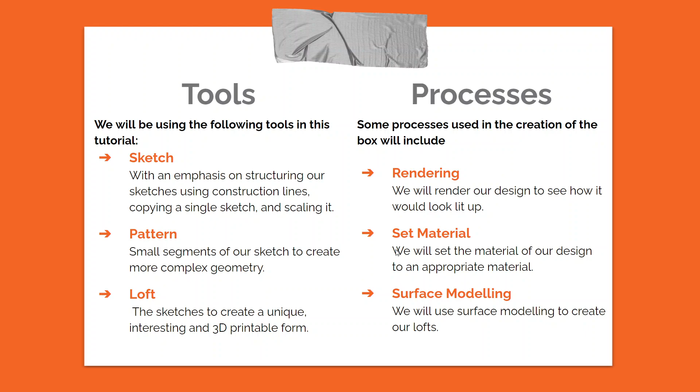So the idea of this is to make a pretty looking lamp. Lamps obviously have the functionality of providing light, but they're doing so in a way that kind of brightens up our environment in more than just luminosity.

The lampshade itself will be a single wall print called vase mode, and it should fit into the rest of your design stably as well. We'll also be incorporating LED strip lighting, like I said before. So without further ado, let's go and get into it.

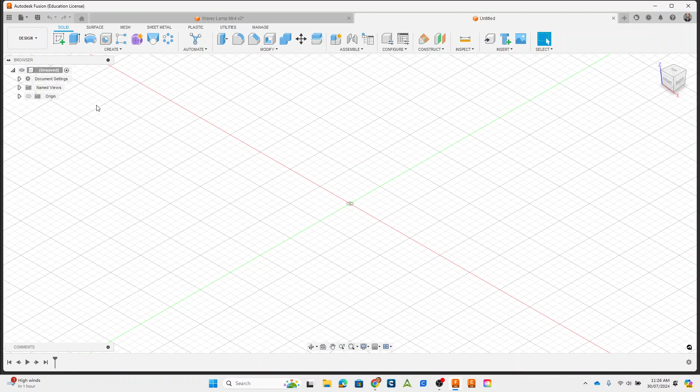Okay, just getting my display up and running. So I'm going to dive straight in. We're going to do our two sketches that I've shown in class before. So we're going to go onto our base plane there, and I'm going to do a construction sketch to kind of shape the rest of the pattern that goes around it.

So these measurements are important, particularly the difference between them. I want 30 millimeters diameter difference between these two circles. So one is at 170, and the second is at 200. Okay, so they are fully constrained to the origin there, and they're construction circles.

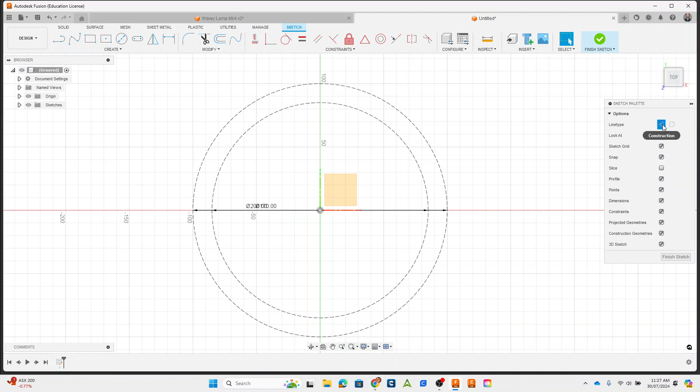If they look like this, they're solid, we don't want that. We want construction lines. You can turn any line between construction or solid just by clicking this little toggle switch here. So now I am going to...

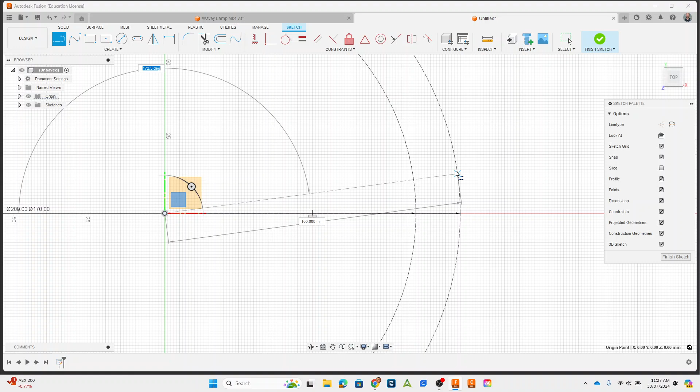Make a couple of straight lines all the way out to the outer circle, again as a construction line. You won't really see the first one there, but you want to click in the middle and come out, and if you press tab, you'll be able to go between the measurement, so it's 100 radius, or the degrees. Here it's measuring from the other side over here all the way to here. I want 10 degrees difference, so I'm going to type in 170.

So this one is 20 from that original measurement there. Always remember to press tab. 30, and I'll do one more just in case I need it. It's also possible that I'll need to go in. Just watch out for these ones as well, sometimes you click and it doesn't register properly. I'm just going to undo that little line that didn't come out properly.

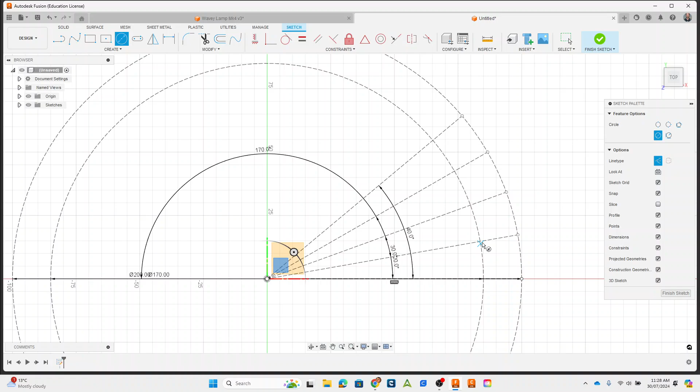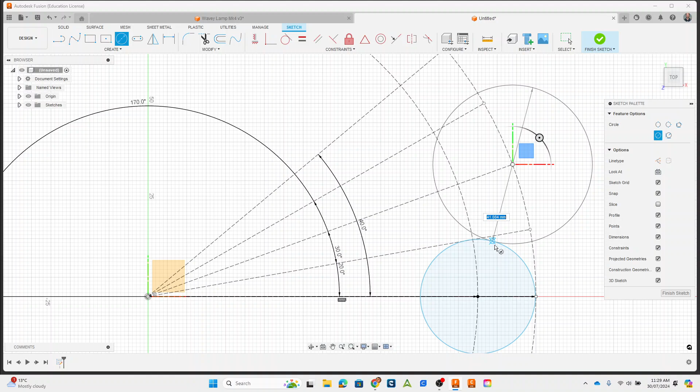Click in the center of the circle, connect to the edge, and then type in the exact degrees that you want. Now what I'm going to do is draw a series of circles, relying on these 10 degree increments for my radius. So I'm going to go to solid line, drawing a center circle here to here. I'm going to look for that X to kind of connect, then connect here, and you'll see that that's like a tangential connection between these two circles.

Actually, what I've realized is I need to do a 5-degree increment here. I think that's the issue I need to solve anyway. So I'll do 5 degrees here. So that should be 1, 5, 15. Another one. 25.

And 35. All right, let's see how this goes. That's better. So I want that one there, and then I want to go 10 degrees, 15 degrees, so 15 degrees more, 5, 10, 15. Draw another circle out to here.

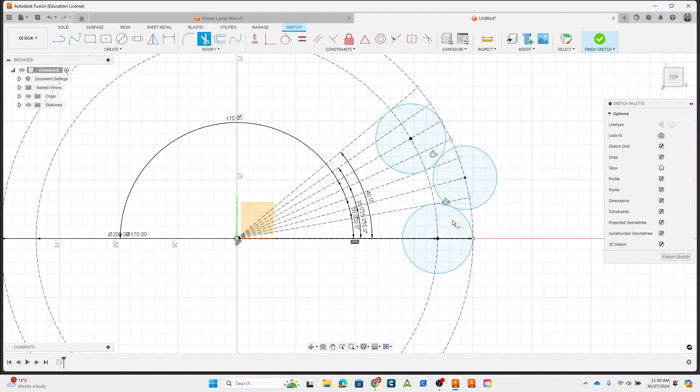That's really all I need to make this kind of repetitive, circular, wavy pattern. I just need really the main segment from these 2 circles, but I need this third one to know where to cut it off. So I need that.

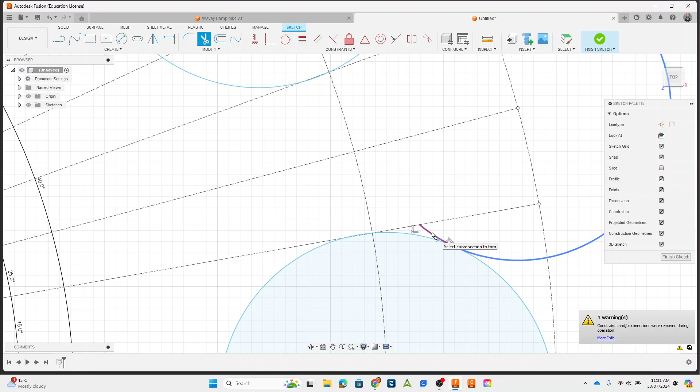What I'm going to do here is go to the trim tool and trim out all these little bits of circle that I don't need. And now I need to pick where this pattern repeats, because I want this to be nice and tidy. So where did I have it last time? What I'm going to need to do here is extend this pattern out just a little bit.

So it'll be 45 degrees. Draw my next circle. So that's 1, 2, 3, 15 degrees across.

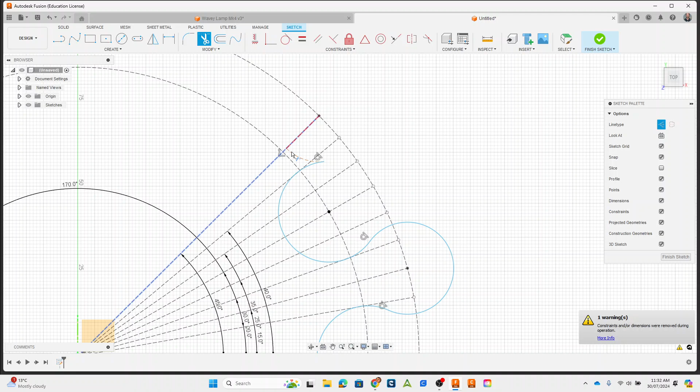This is where I actually don't need to make this solid at all, that's where I trim out my circle. So I trim out all these other bits that I don't need. I want this repetition to be clean, so here to here, and I trim out all of this circle until I get to this spot here.

So what I want this to do is to curve and then meet when I repeat this over the top. I want this to match up.

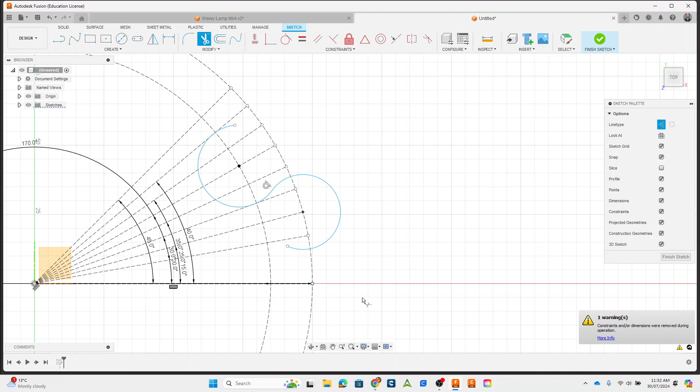So what I'm going to do next is select those 2 parts of the line that I've drawn, control clicking, so I hold down control, click each one, and I'm going to go to create circular pattern. The good news is you only have to do this once. Once you have this sketch, you can repeat it as much as you want.

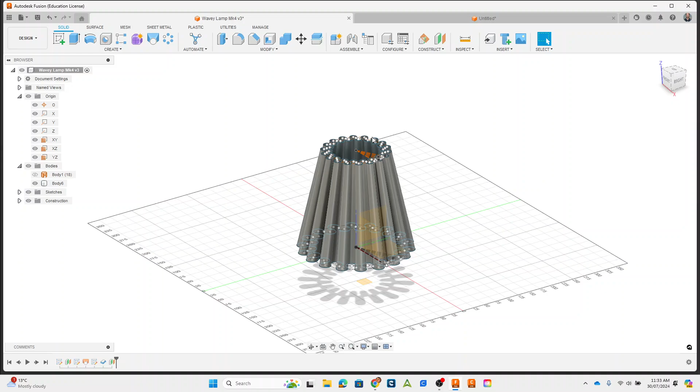Now what I'm going to do is go up in my repetitions, and there I have 12 repetitions there. If you use smaller increments for these angles, I believe in this one I used increments of 2.5 degrees, but you can see this one has the same look, but slightly different result. That's all you need to do for that particular sketch.

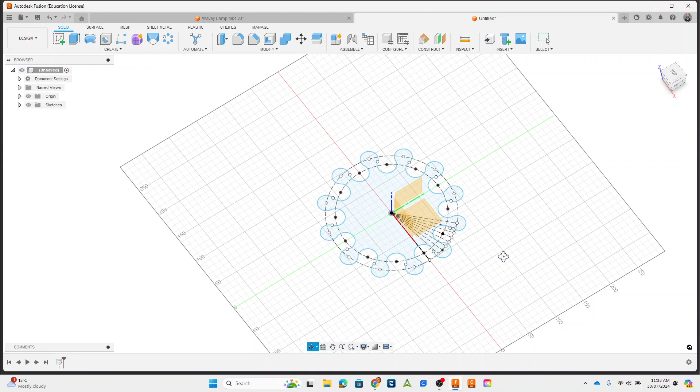Okay, so that's the base shape of our lamp. So what I'm going to do next is run a loft to actually make the lampshade shape.

So I'm having a bit of trouble clicking on this plane here, but I can also make a new plane based on this one as well. And I want to make this one about 200 millimeters tall, maybe a bit less, but I'll start with that. And I'll sketch onto this surface here.

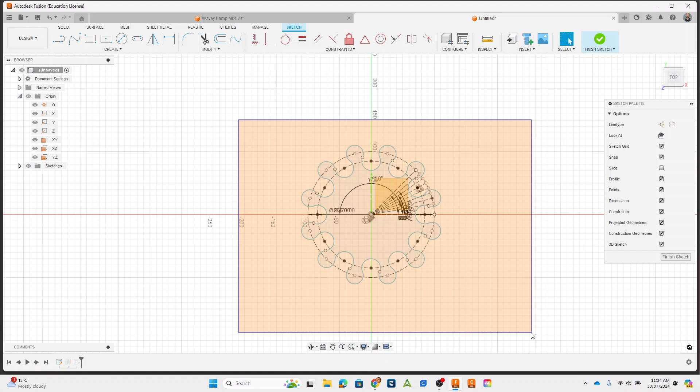Sorry, critical thing I forgot. What I want to do is, before I leave this sketch, go in and select it. So while the sketch is active, you'll see I'm editing this sketch, right-click, edit, select the entire sketch and go Control-C or right-click, copy.

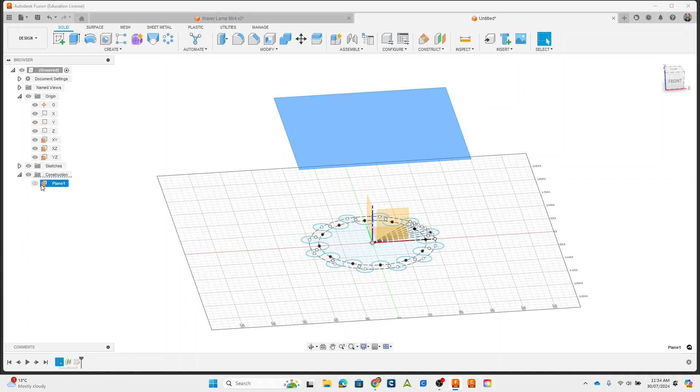Then you go Finish Sketch, then you find your new construction plane, sketch onto that, and then Control-V or right-click Paste. Now I've got two sketches that are exactly the same.

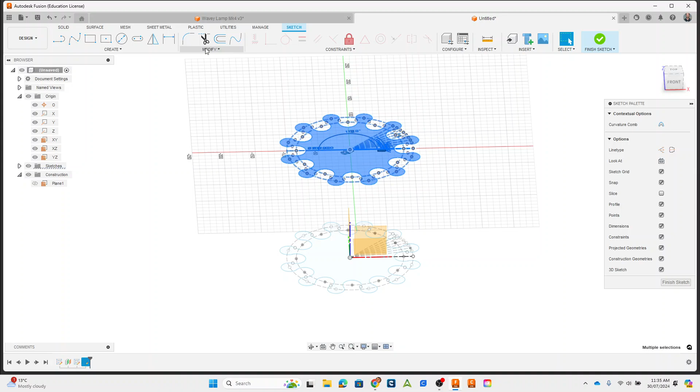I could loft these and they'd look pretty good, but I'm going to go for a bit of a slanted lamp design here. So I'm going to go OK on that positioning, select this all again, and then I'm going to go to Modify, Sketch Scale.

I've already got all the entities, which is all the lines and everything in this sketch, selected. They are going to scale around the origin here. And I'm going to make that 0.6, or 60% the size. Because it's the same sketch, it'll link up to itself really nicely.

So what I do from here, I'm going to switch over to surface mode, because I don't want this to be a solid object. I want this to be a thin lampshade. And you'll see loft here as well. So create loft. What this will do is loft a surface and not a solid.

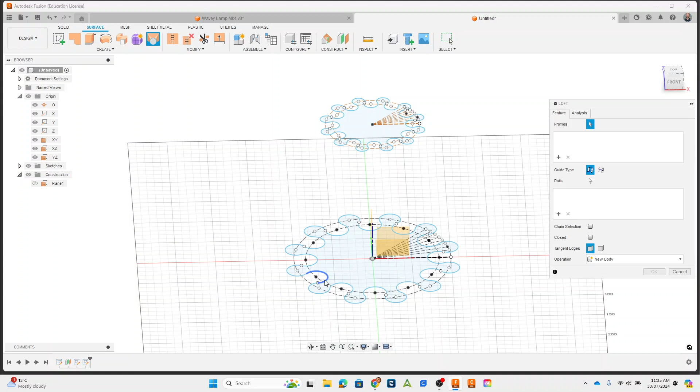So here, loft, section 1, section 2. Fantastic. The way Fusion tells you this is a surface, meaning perfectly thin with no actual volume, is it gives you this kind of orange tint to it. But making this into a solid object is really easy.

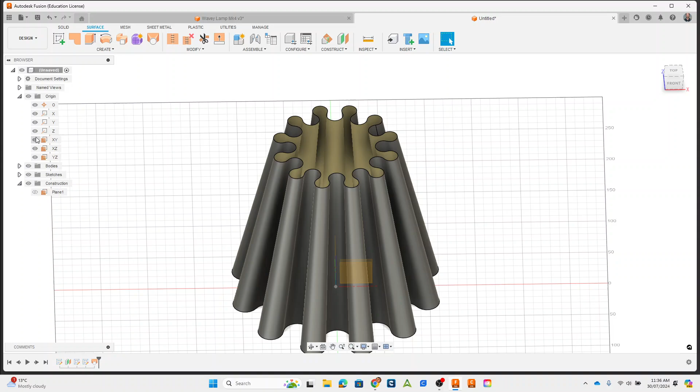All you need to do is actually select the body itself, go back to solid mode, and go create thicken. So with that body selected, I'm going to make that 0.4 millimeters, which is the size of my printer extrusion path when it's actually printing out itself. So I'm going to go 0.4 and hit enter.

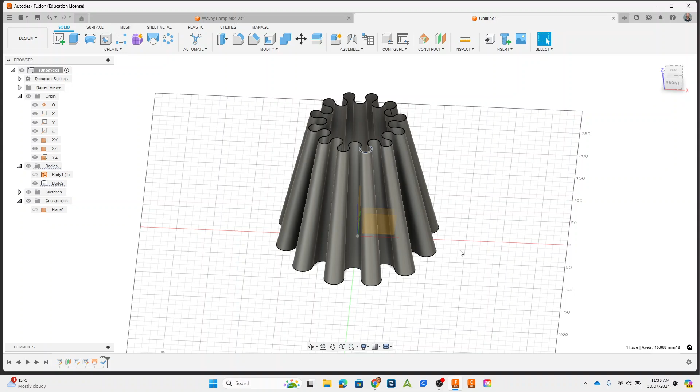And if I zoom in here, you'll see body 2 is now a solid, and it's got a super, super thin 0.4 millimeter thick wall all the way around. That should extrude as one thing, right? So it should just be able to go round and round and round and print really quickly. So that's my lampshade. If I wanted to, I could go in and make a new component out of this. I probably should if I'm modeling the right way.

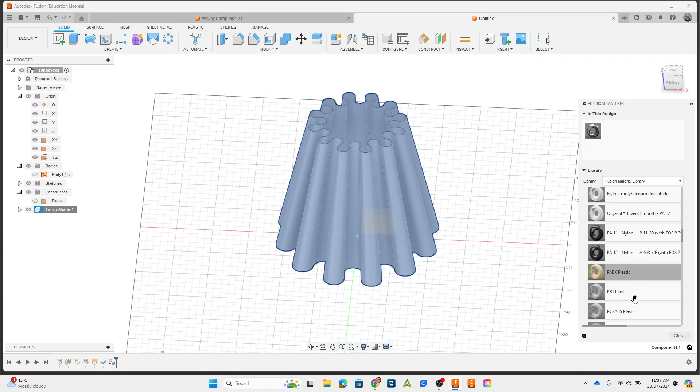I'll call that lampshade, and I'll even go in and change the physical material to the material I'm planning on printing in. That's going to be plastic, PETG, or PET plastic. There we go, PET plastic. I'm just going to drag and drop, and that'll turn it into a transparent type color.

If I ever wanted to edit that physical material, you might be able to edit colors over here. Go edit. I might be able to change this to a green color, maybe. There you go. I can actually kind of render it there as well. We do have transparent green PET and transparent red as well.

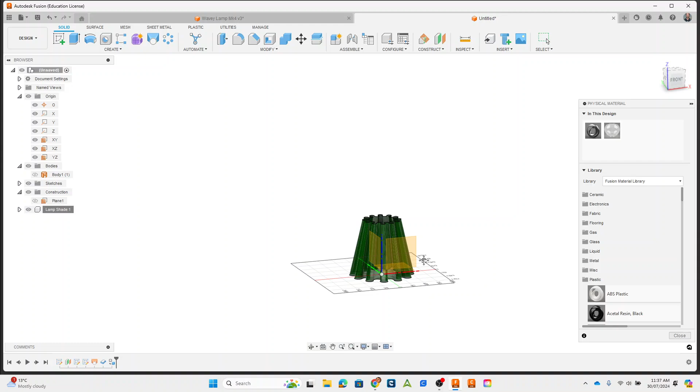I'm going to leave this as transparent green just so I can see it a bit better. But if it ends up getting in the way and making it harder to see, I'll remove it. Okay, I'll close that. Now I'm going to make the base.

This is going to be fairly straightforward. I'm going to use lofting again. What I want this to be is kind of like, I want it to have a little bit of a bulby base and then go up and interact and touch this other component here. All right, so I'm going to be using straight up circles to do that.

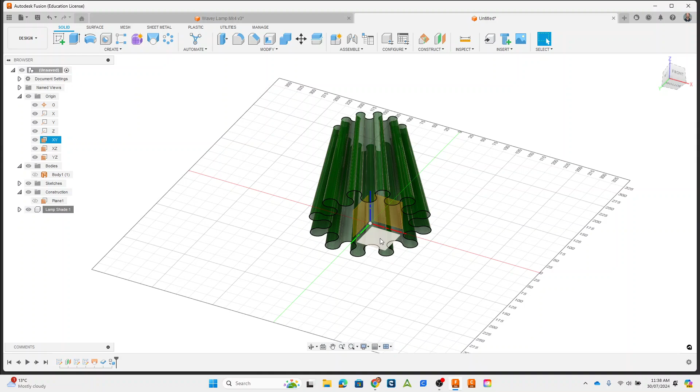First up, I have to go to my planes and actually sketch this out. 75 millimeters below. You can make up your own measurements if you want, or you can copy mine. 20 millimeters above, that should be able to come out, and then I'll restrict it here, and then almost to the top. Go there.

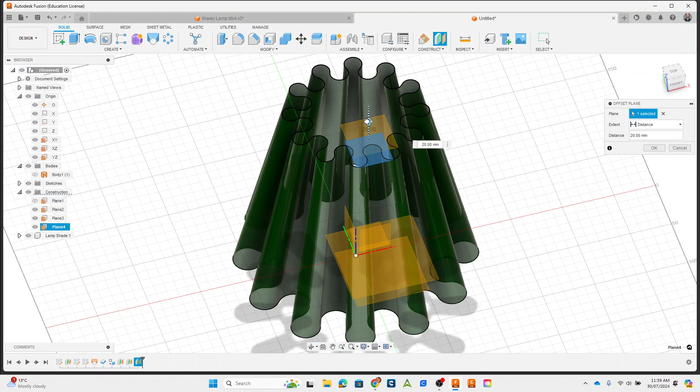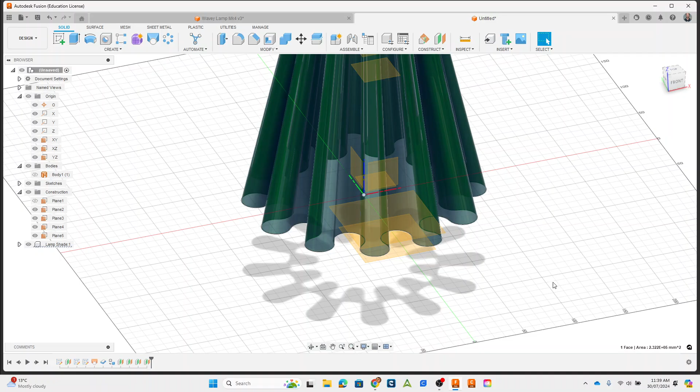And then one more on top of this. All right, so my connection point between my base and my lampshade will be about along here, okay? What I'm actually going to do is get the body of the lampshade and the body of the base to interact. They lock into each other really nicely, and I won't have to do really fine sizing. It should work okay for me.

Okay, I also can't forget to have a section in the middle that's flat, that's perfectly round and cylindrical, so I can add my light strip to it as well. Okay, so I'm going to go through here and add a series of circles. And I'm going to keep my lamp base there.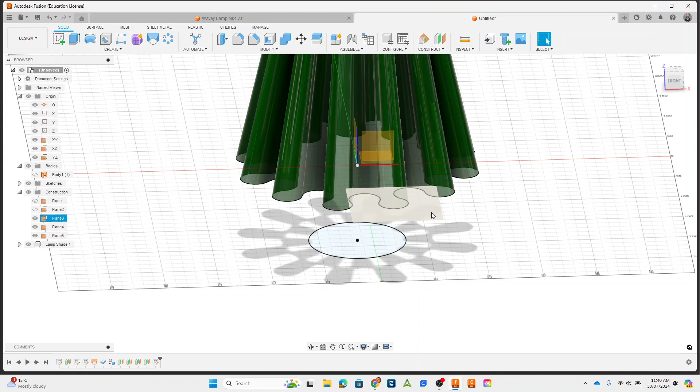So I'll make this one 90. I'm just eyeballing this, I'm doing what looks good. So 90 there. I want this to be quite bulbous, this next part. So I'm going to go to my next plane after I finish that sketch. Add a sketch. Make sure I'm in the middle.

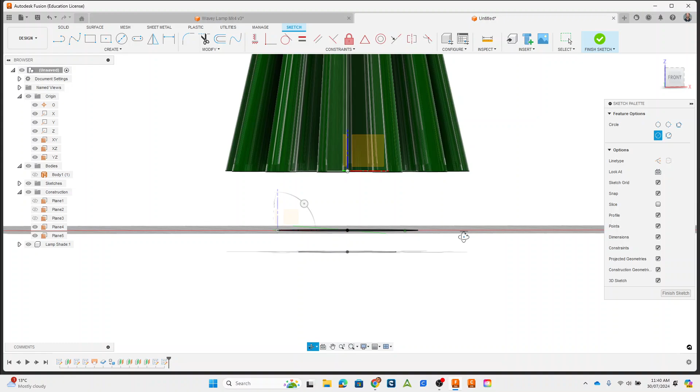And these will be the profiles of your shape as you loft it up. So you can kind of, I'll make it 130. That looks about right. Finish that sketch, I'll go up to here. If it's not quite right, each of these I can come back and edit as I go through. And I will have to edit this kind of curved shape after it's made to make my cylindrical part for the lights. So here as well.

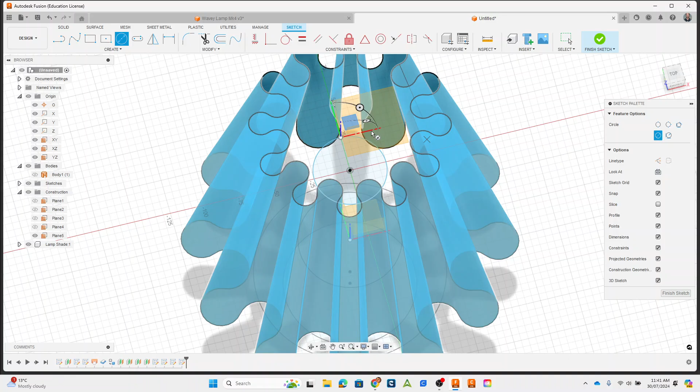Make that 50. And this one, I'm going to make sure that it comes out past, well outside the diameter of my lamp. Okay, so see there? I don't want it to be inside here at all. I want it to be well outside. And I'll show you why in a sec.

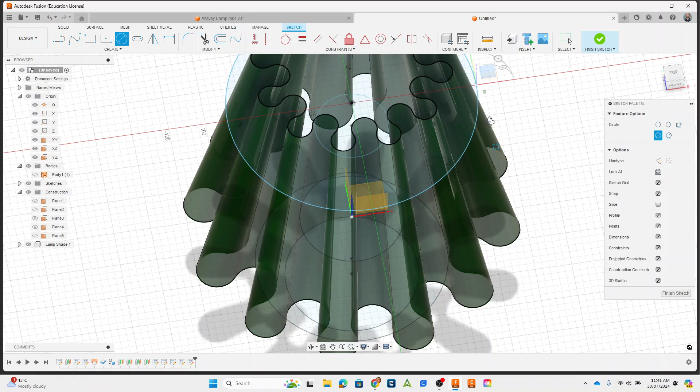Okay, so now I'm going to run a simple loft function on top of this. This will be a solid loft. So I'll go base, next section, next section. Sometimes you have to kind of angle yourself so you can see the next part.

And there we go, I'm going to make this a new component. I'm just going to go straight there to new component. Okay, and if I turn off my lampshade, so if I turn off the view of my lampshade, you'll see the kind of form I've made here. Okay.

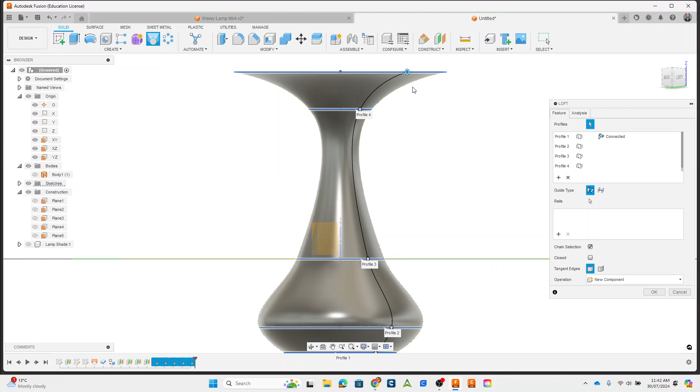Now, one thing I can see is maybe that angle might be a little bit high because I want this to all 3D print nicely. You can see some little kind of, I want this to be all smooth and, you know, yeah, I want it to be like a really even curve all the way. So this one, I might need to change the angle there.

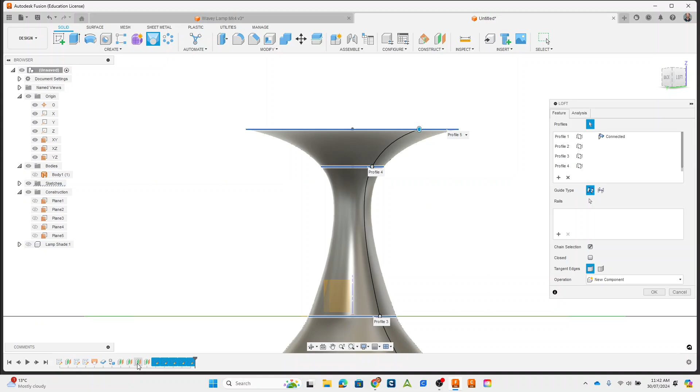I'll do it by actually dropping this sketch plane. I'll go OK on this, and then I'll just tweak my planes a little bit. I'll go edit feature. I'll drop that by 20 mil or so.

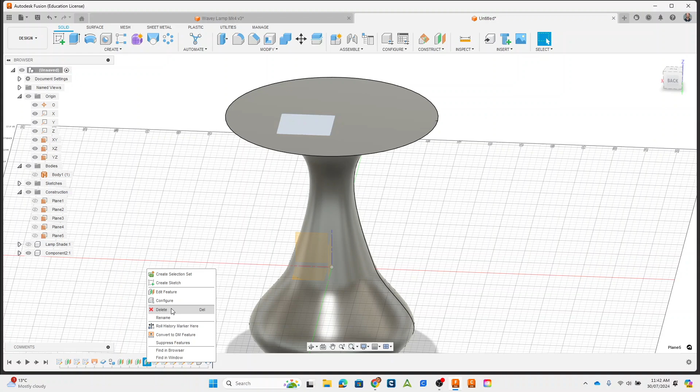I can also get the very top one and move that up as well. So I'll go edit feature. 25 mil, see how that looks. So what I want to avoid is this being too much of an overhang.

Might move this one up just a little bit. See how that looks when it's with my lamp. Cool.

Might move these little ones out a bit more. So I'll go edit feature. Another 10 mil there.

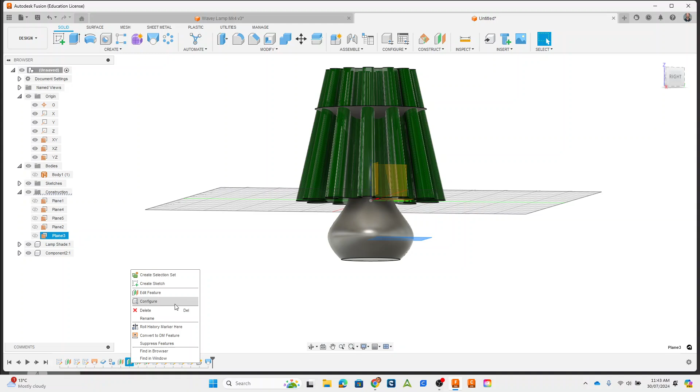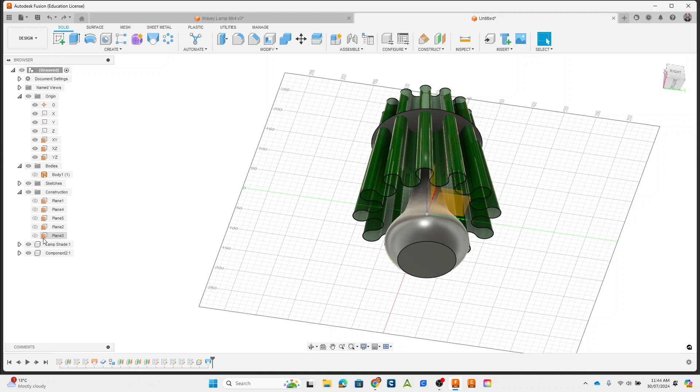I'll leave it like that. Okay, now is the time where I'm going to get the central part worked out. So what I'm going to do is actually use the combine function up here to make this work, and I have to do it between the two bodies of each component that I've got here.

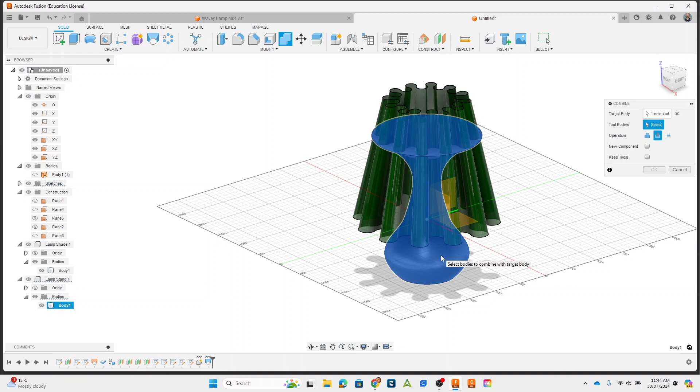I'm just going to rename this component lamp stand, and I'm going to open up these two components here so I can see the bodies of each of them. So I've got body one here, body one here. And I'm going to hit combine and cut. The target body is the thing that I want to cut, and the tool body is the thing that I want to use to make the shape I want to cut. So I want to cut out the lamp base, and the tool body is going to be the lamp shade.

But after this process is run, I want to keep all of the tools involved. I'm going to go all right on that.

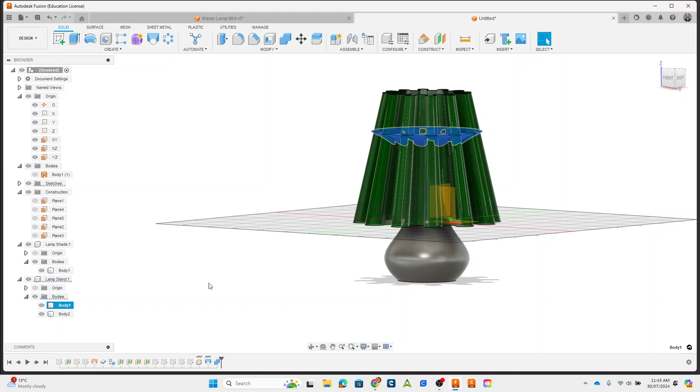And then what we'll see here is I've got two bodies, an inside and an outside body. So body 2, I want to keep. Body 1, I want to delete. Actually, I don't want to delete, I want to do a special remove. There we go. Okay, and now this is sitting perfectly on the inside of our lamp.

Pretty cool. If I print this, I could actually maybe even get away with printing this upside down. Now, I'm almost certain this would work, and it will actually hold the lamp in place. But it's definitely a new thing that I'm trying here.

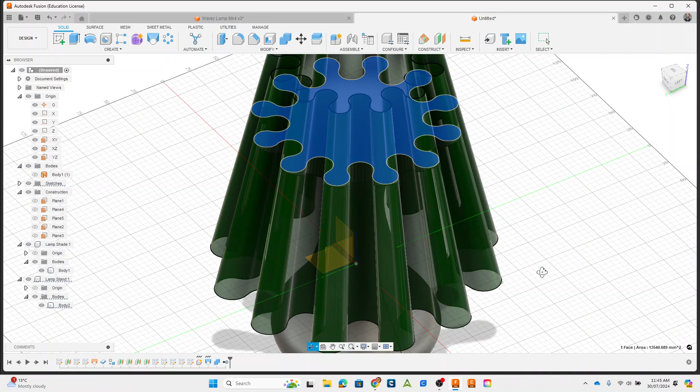Now what I want to do finally is a couple of things. I want to make sure that I can actually put my lights on this lampshade. So I want to go around here, sketch onto this middle part, and I want to actually carve like a square chunk almost out of this side.

I'll pick one side to do a chamfer out of, because remember I have to 3D print this, so I have to do it in a way that's sympathetic to the 3D printing process. Looking at this, it seems like it might actually be best printed upside down, so I might put a chamfer here and then straight here to here. So something like that. I'll go ahead and do that.

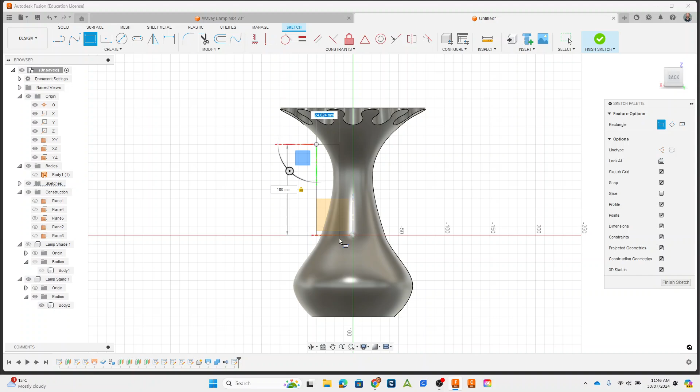I'll do a corner. I'll make it 100 high and 25 across. Good.

I'll put a 45-degree angle on this as well. 135, I believe it is. I'll trim out the bits I don't want, that one and that one. And then with that sketch, I'll run a revolve.

Okay, so I've got my profile selected. The axis I want to select is this one. And that's what it'll do there. So I'm running a cut function revolved around that center part. And my LED strip lighting will wrap around here as much as I can.

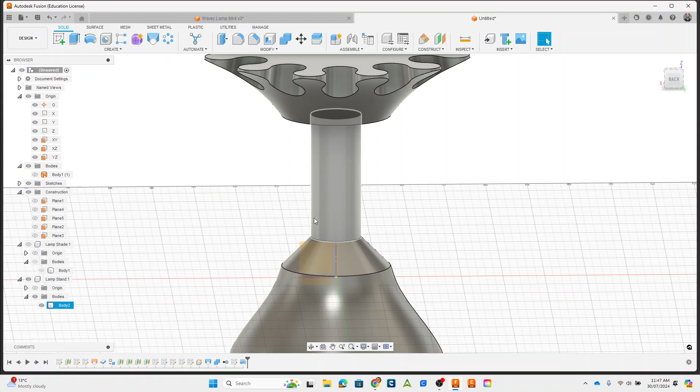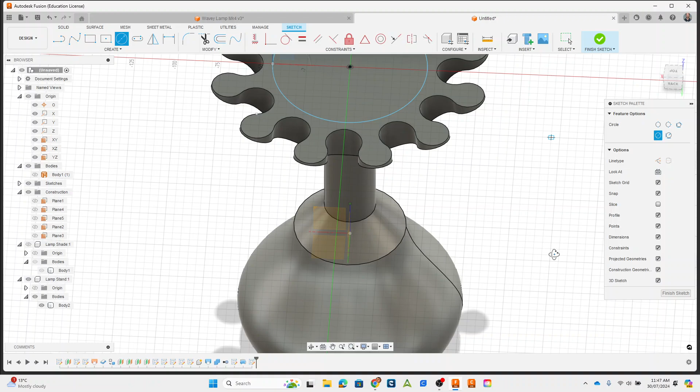Some other things I want to do is maybe remove some material out of here so I can let light through. So I'll sketch onto this one. Draw a circle out to here. I'm using my project function here, so I'm projecting the outside of that cylinder into the middle of my work here, so I know exactly where it is. I can actually use that in this sketch as well.

What I'm going to do is repeat a pattern around here, so I have little slices kind of sticking these two parts of the 3D model together.

What I'll actually do is an offset. So I'm going to make this line here a construction line, then I'm going to offset it by 2 mils. And I'll do the same here as well in the middle, offset this time by -2 mils.

Okay, then make each of these solid. These aren't quite meeting the bottom of the circle here, so I will extend them a bit.

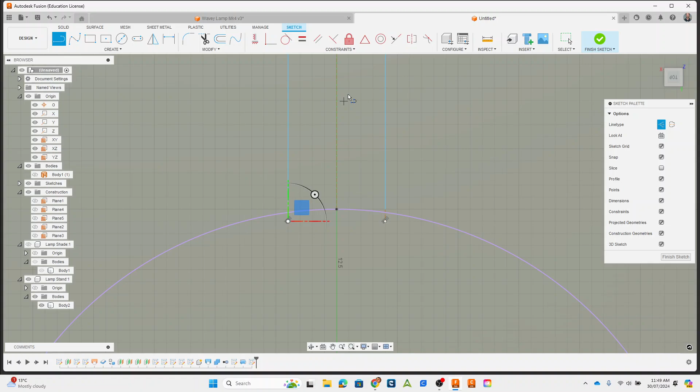Go through and make these lines solid, and I should be good to go to repeat that around. There we go.

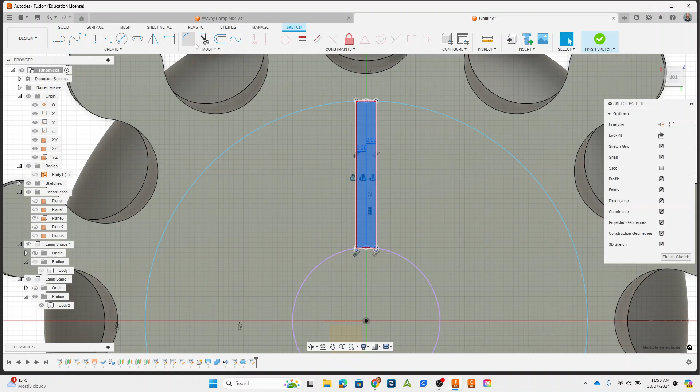Once that's registering, I can take these lines, select them, and go create circular pattern. Select my center there. I'd be able to get away with just 3 of these because I'd be removing all of that material from in there. I could do 5, I could do more if I wanted to. I might go with 6, why not?

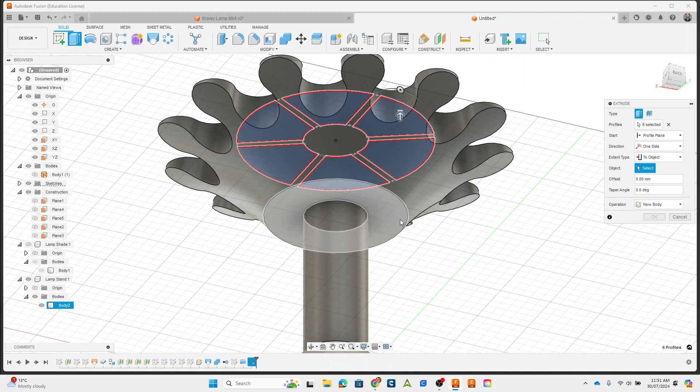Then what I'm going to do here is select these internal parts and extrude those through as a cut. So I'll select them again: 1, 2, 3, 4, 5, 6. Extrude. I want to go till I get to this surface pretty much, so I'm going to set extent type to object, to that plane, and that'll cut all the way through.

I'm not the biggest fan of this little lip here, but that material has to be removed anyway. I might try doing a push-pull. Oh, not bad.

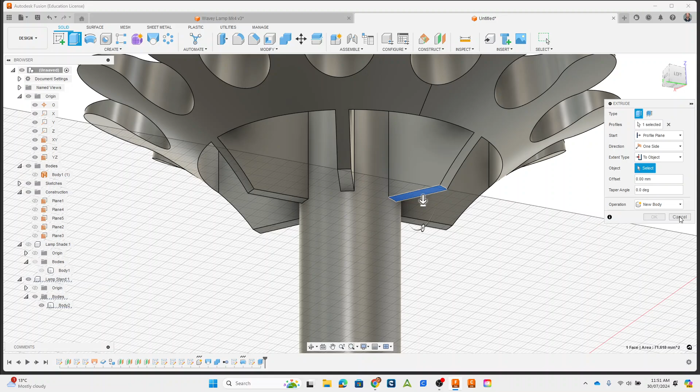I might actually see if extrusion works. No, I'll just pull this plane back. It's pretty much at the top there.

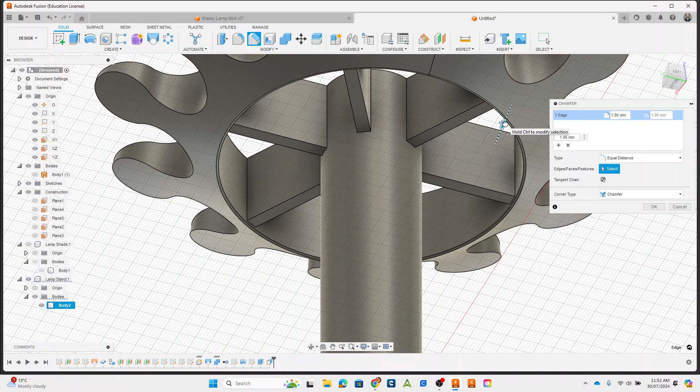And then finally on here, I'm going to do a chamfer. I'll be printing this upside down like that.

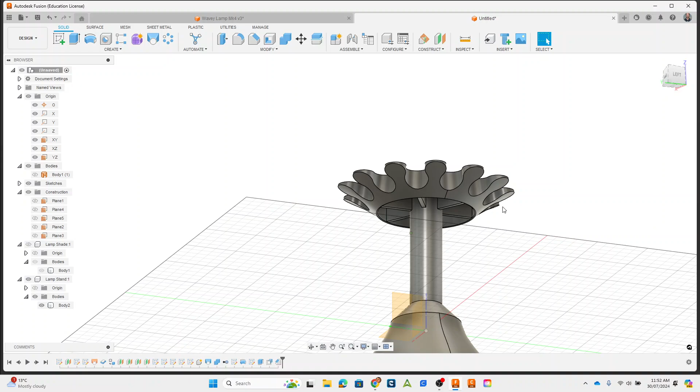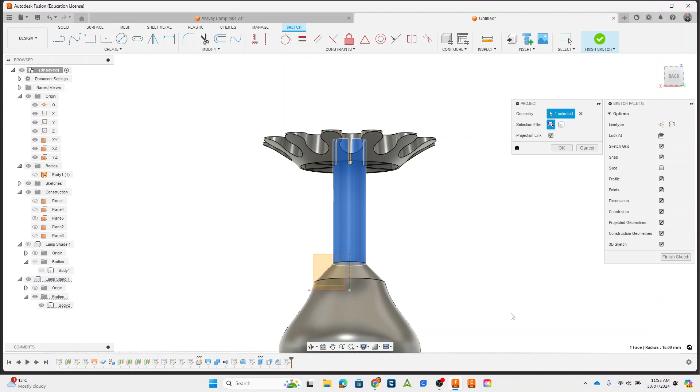So that's pretty much how our lamp should go, but we also have to think about how we're going to get our power cord into this as well. So here, I'll sketch onto the base, and essentially I'll just run a little hole going all the way up here and then out.

Okay, finish sketch, grab that part, extrude up. That's where my LED strip will come out.

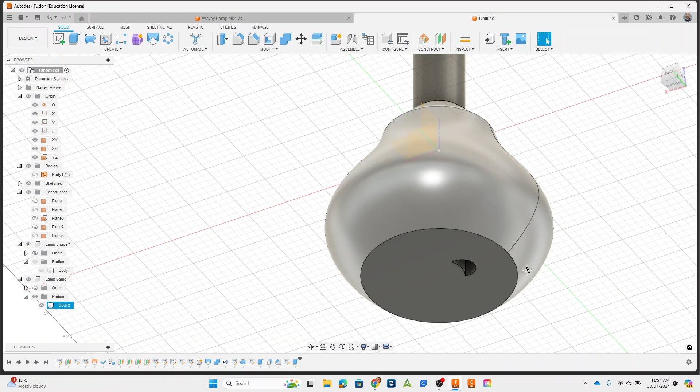Sketch back onto here, and then I'll use the edge of this little arc here to make my lines out to the side.

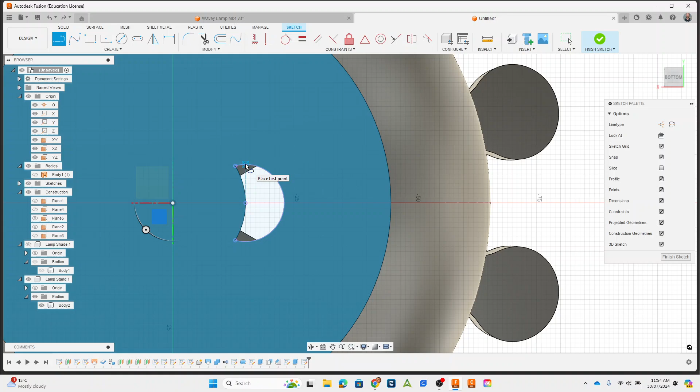And I should be just done in time. Finish the sketch. Kind of similar to our phone holder, I'll extrude this up 5 millimeters or so, and I'll put a negative 20-degree slant on it, or more.

And that is pretty much it. Just going to clean that up, and that's it. Thanks a lot, guys.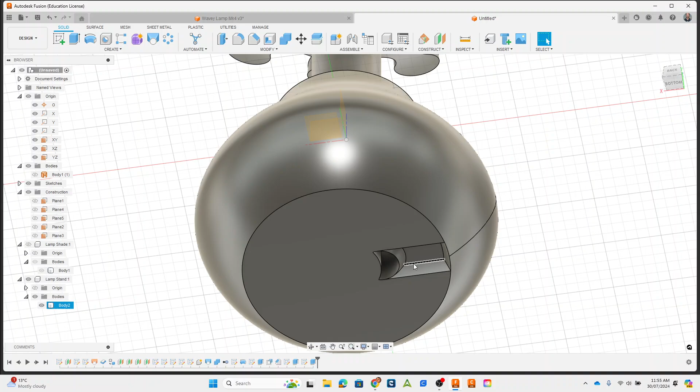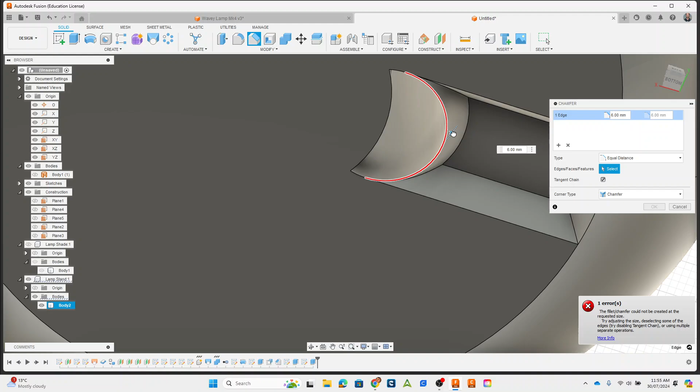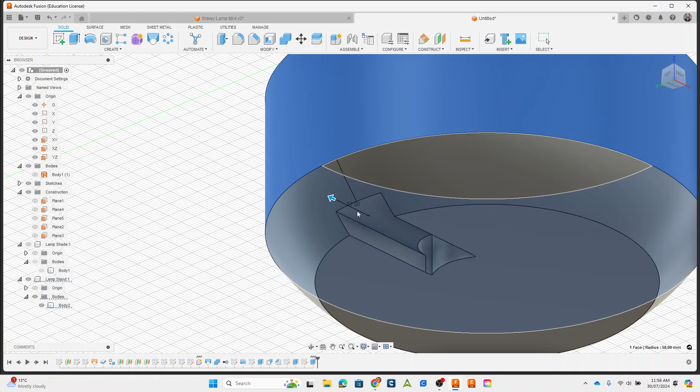That should give enough room for everything to come out. And chamfers on this.

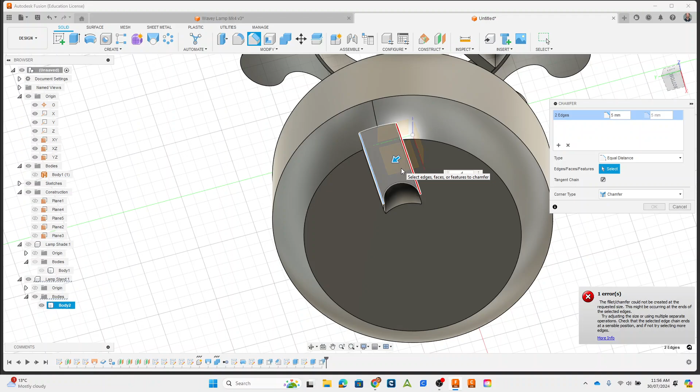Okay, what I might actually do is not this sketch. I'll go at it from a different angle. So let's get under here. We'll project that.

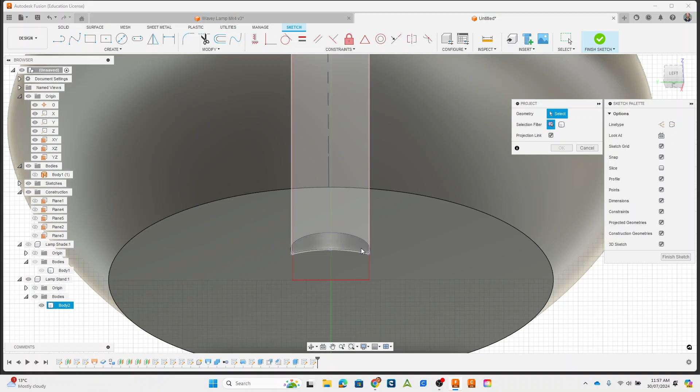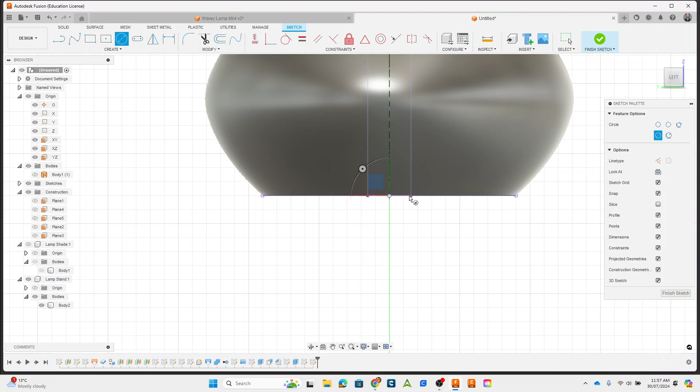I'll project the bottom here as well, and then I'll just make an arc between here and here. Awesome, trim out the stuff I don't want. Finish sketch.

Okay, let's do one little bit on the bottom here. Okay.

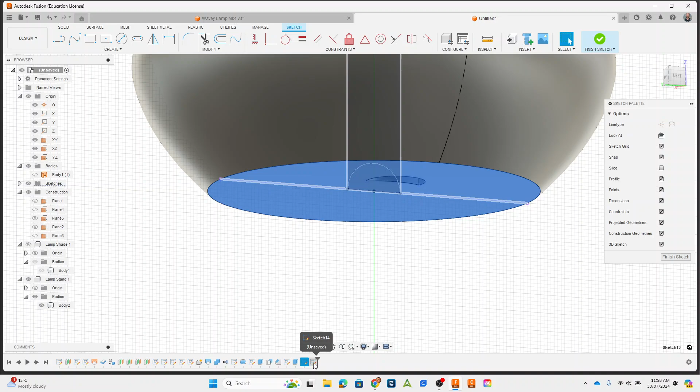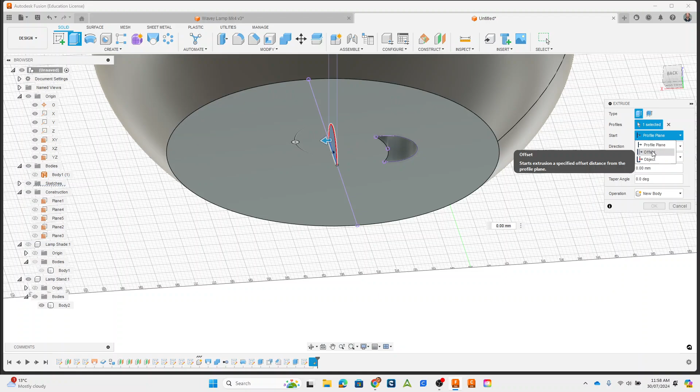Then I'm going to do an extrude with that selected, with an offset. So under start, I'm going to go to offset. I'm going to offset it to 20, minus 20, minus 15 - I'm just eyeballing a little bit here. Minus 15, minus 10 is a bit too much. Minus 13, that's good.

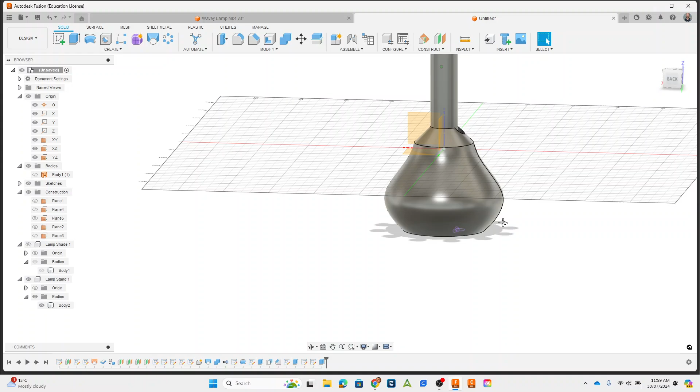Okay, and then I'll continue this cut out to the side. Again, you don't have to do it like this - you can work out your own way of getting your cord in. This is just the process I've chosen. Nice simple design. The idea is that cord will go up into here, wrap around, and there's your lamp. All right, so that is pretty much done.

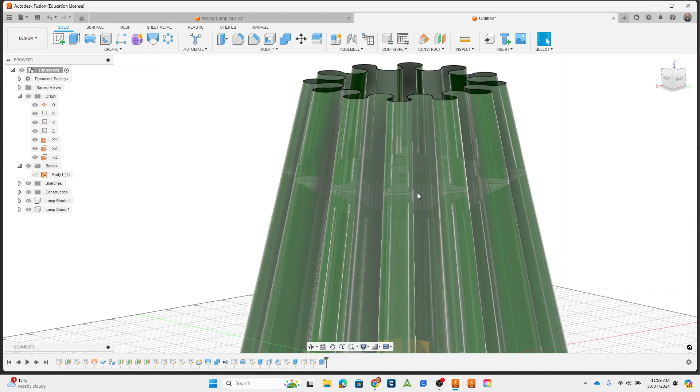So the lights will go around here. In retrospect, I probably could make this go a little bit higher. Being parametric design, I could actually change that if I wanted to.

So that would involve changing this top plane up. I'll go edit feature, move it up a bit more, see how that works, see if it recalculates. If it doesn't work, I can always just redo it. That should work.

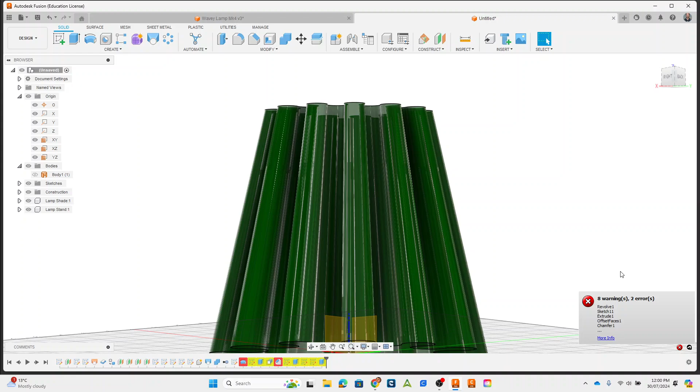Try moving the next one down, up a little bit, edit feature. Didn't like that one, but it's like the first one I did.

Cool, so hopefully that should just slot in. We'll see how that goes. I'll have a go at printing it, and yeah, I'll get back to you soon.

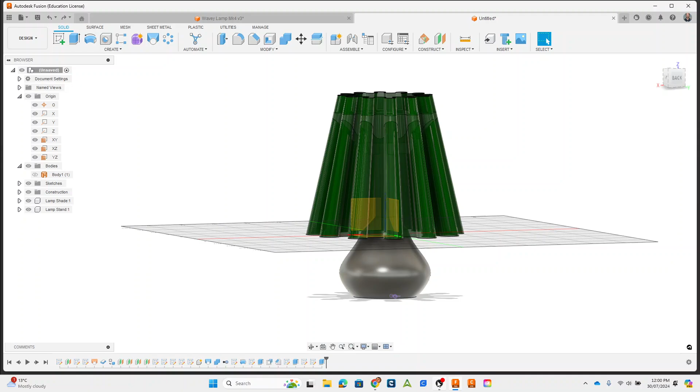All right, so let's just go back quickly to our tutorial and just sum up. So we made our lamp, we've made it 3D printable, and we've made spots to incorporate our lighting as well. So all of our success criteria have been achieved there.